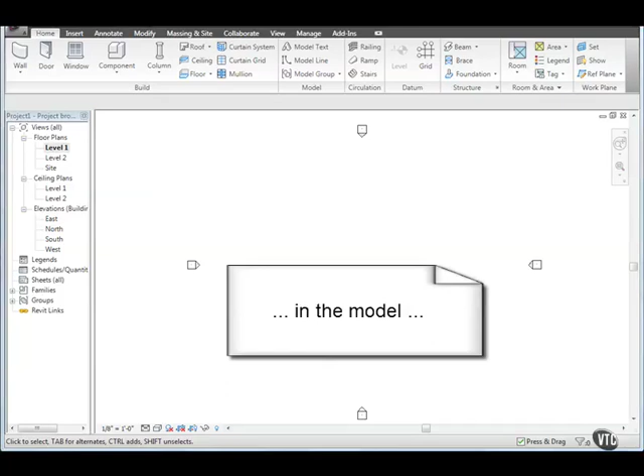In the Revit architecture model, every drawing sheet, 2D and 3D view, and schedule is a presentation of information from the same underlying building model database. As you work in drawing views and schedule views, Revit architecture collects information about the building project and coordinates this information across all other representations of the project.

The Revit architecture parametric change engine automatically coordinates changes made anywhere in model views, drawing sheets, schedules, sections, and plans. The term parametric refers to the relationships among all elements of the model that enable the coordination and change management that Revit architecture provides.

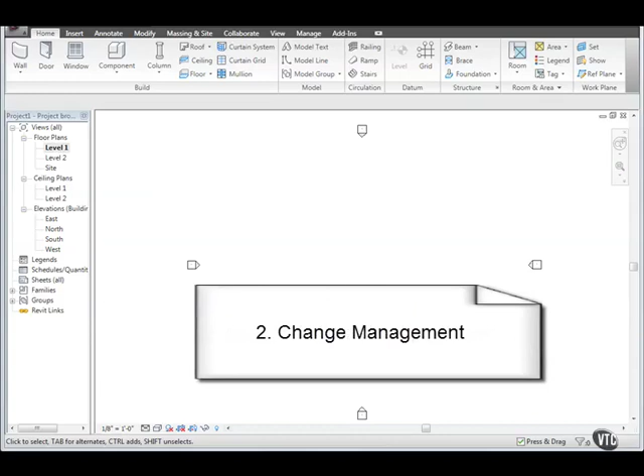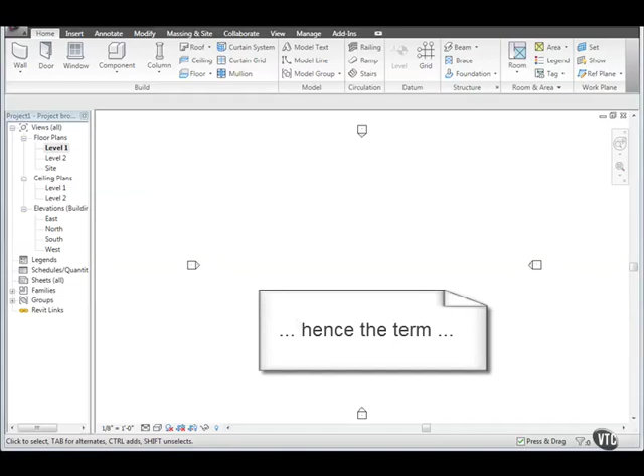These relationships are created either automatically by the software or by you as you work. In mathematics and mechanical CAD, the numbers or characteristics that define these kinds of relationships are called parameters. That is why the operation of the software is parametric.

This capability delivers the fundamental coordination and productivity benefits of Revit architecture, which is change anything at any time, anywhere in the project, and Revit architecture coordinates that change through the entire project.

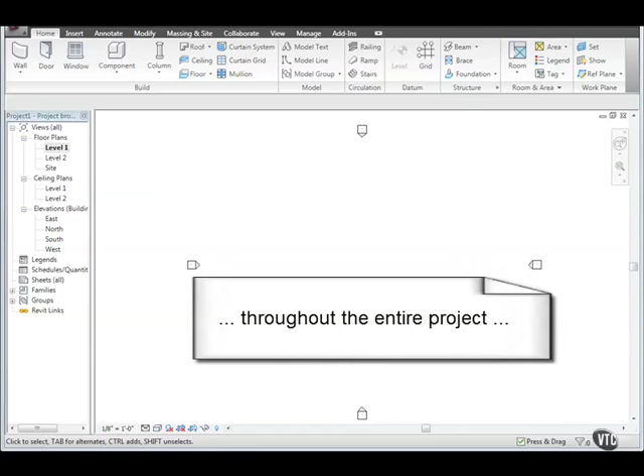For example, let's say you want the outside of a door frame to be a fixed dimension on the hinge side from a perpendicular partition. If you move the partition, the door retains this relationship to the partition.

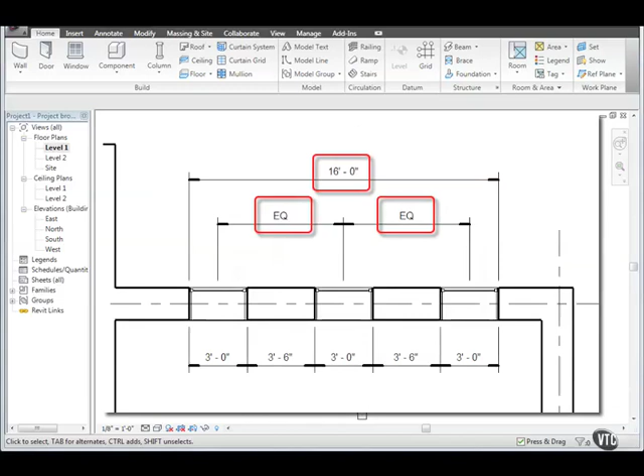Another example of a parametric relationship would be windows or pilasters spaced equally across a given elevation. If the length of the elevation is changed, the relationship of equal spacing is maintained. In this case, the parameter is not a number, but a proportional characteristic.

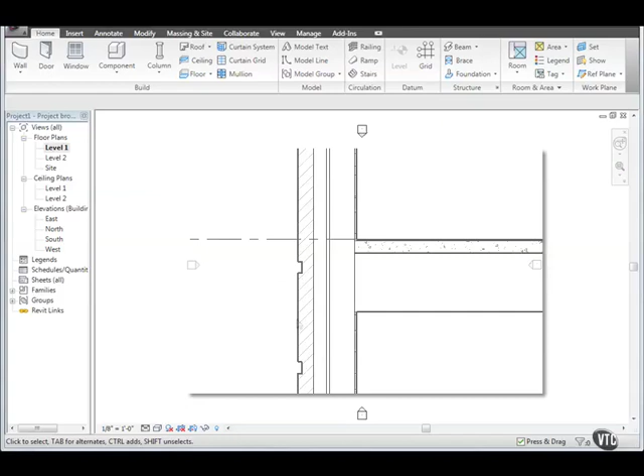Another example of a parametric relationship would be the edge of a floor or roof related to the exterior wall, such that when the exterior wall is moved, the floor or roof remains connected. In this case, the parameter is one of association or connection.

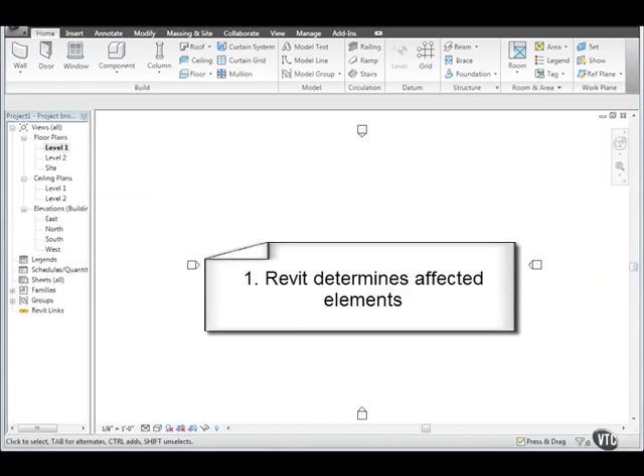A fundamental characteristic of a building information modeling application is the ability to coordinate changes and maintain consistency at all times. You do not have to intervene to update drawings or links. When you change something, Revit architecture immediately determines what is affected by the change and reflects that change to any affected elements. Revit architecture uses two key concepts that make it especially powerful and easy to use.

The first is the capturing of relationships while the designer works. The second is its approach to propagating building changes. The result of these concepts is software that works like you do without requiring entry of data that is unimportant to your design.